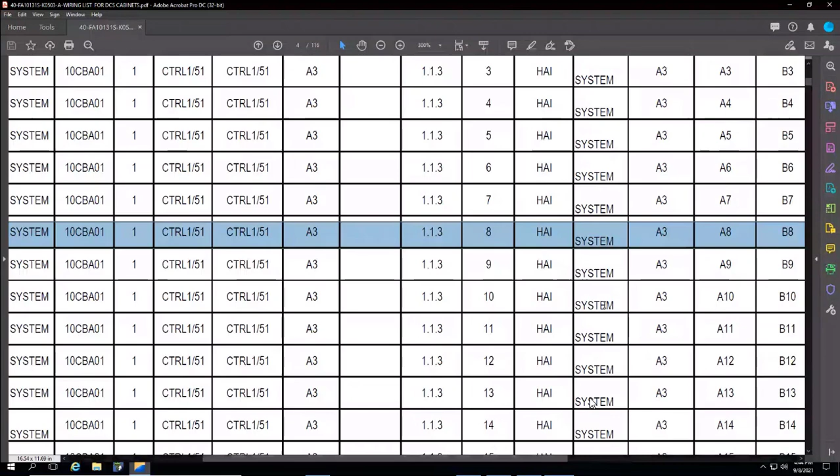If somebody gives you a direction that I want to add this point, are you comfortable to create this particular point, where this will be your point name, and this point name will be configured as an analog input AI module in controller 1 at 113 channel number 8? Give me a go-ahead if you can assign this point from the IO list. Yeah, go ahead, please.

Team, are you comfortable enough if someone asks you this requirement, to assign this point or create this point? Can you create this point name as an AI at 113 channel number 8? The same procedure needs to be repeated. Yeah, please zoom in a little bit. This is my point name. Yeah. Do you want them to create this one now? No, I just need a confirmation from their side.

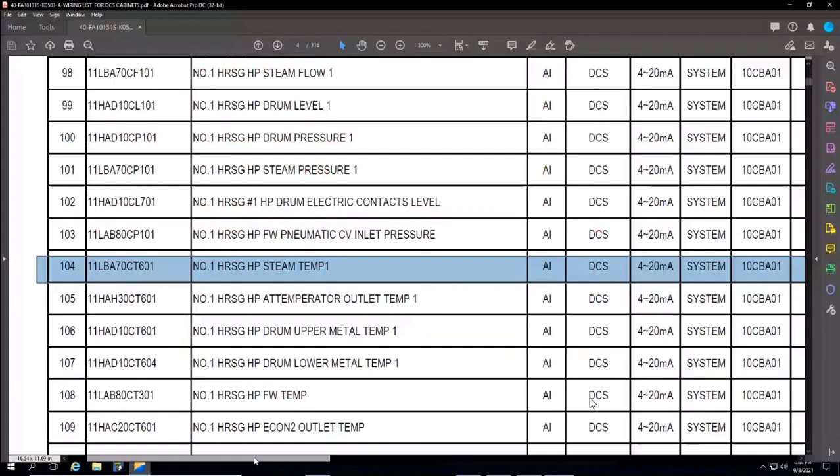The procedure will remain the same. They need to create this point name, assign the hardware, add the module. So I'm just asking them whether they would be comfortable enough. Just replace LT21 with this point name. That's it. It is an AI and it will go to 113 channel number 8. So can participants do this activity as well? Comfortable? Okay. Yes, they are comfortable.

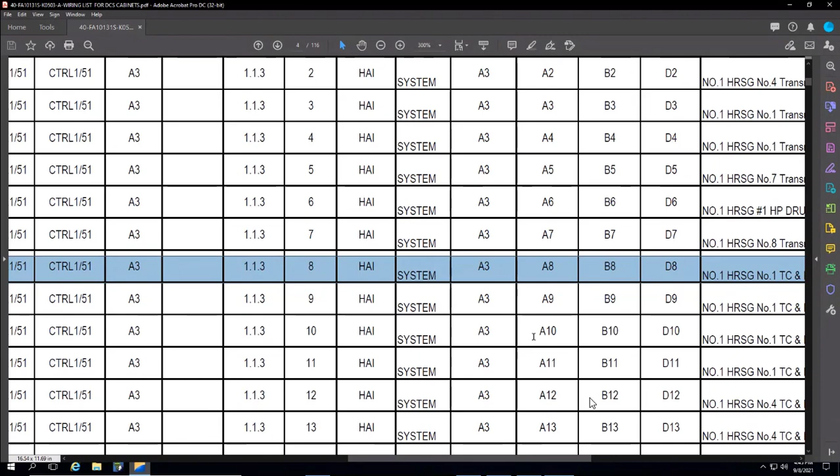Okay. In that case, there is a small exercise for you, which needs to be done after today's session as homework. You already have this IO list with you, right? This IO list is already available in our WhatsApp group. I want you to take any 4 points from this IO list. Every participant who is sitting on controller number 21, controller number 22, and controller number 24 will pick 4 points from this complete IO list, which is around 116 pages. Out of all these points, take any 4 points.

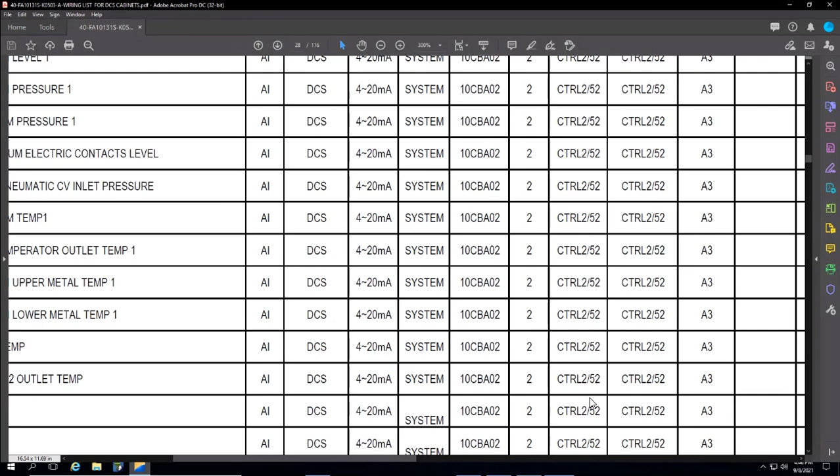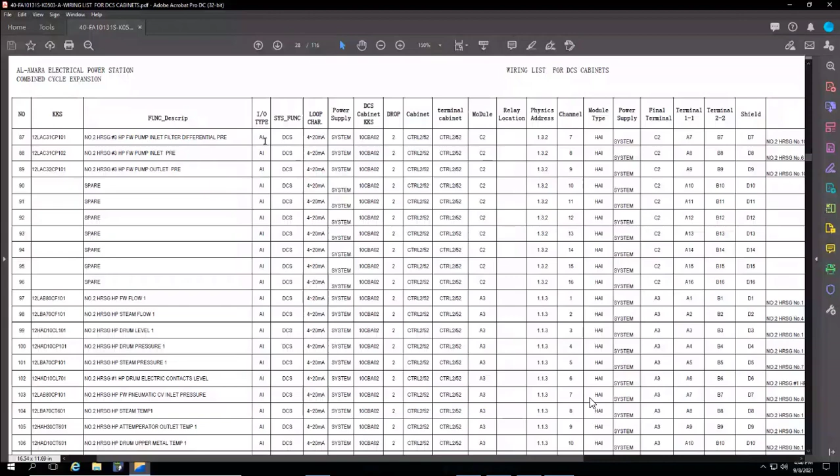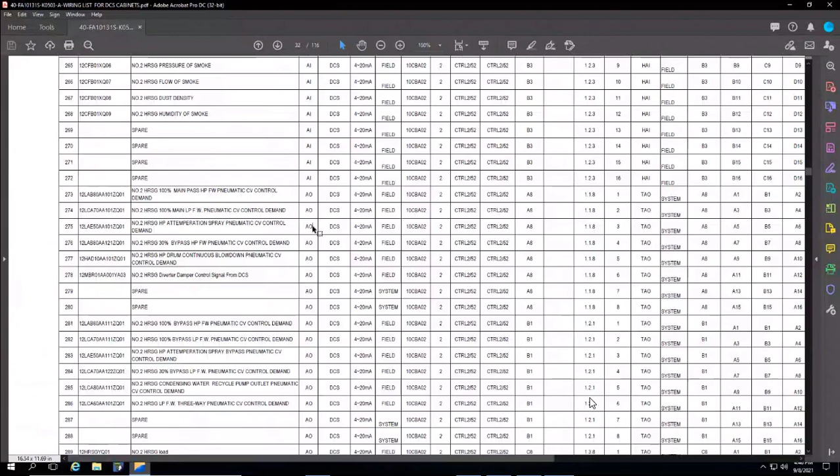For example, one should be AI here in this Excel. The same way, one should be an AO, point number 3 should be DI, and point number 4 should be DO. So this way you have to divide your 4 points from this available list. The same way what you did over here, you need to do it for your project points. Take any 4 points, AI, AO, DI, DO, and assign the hardware of these points as per the address which is mentioned in front of them over here.

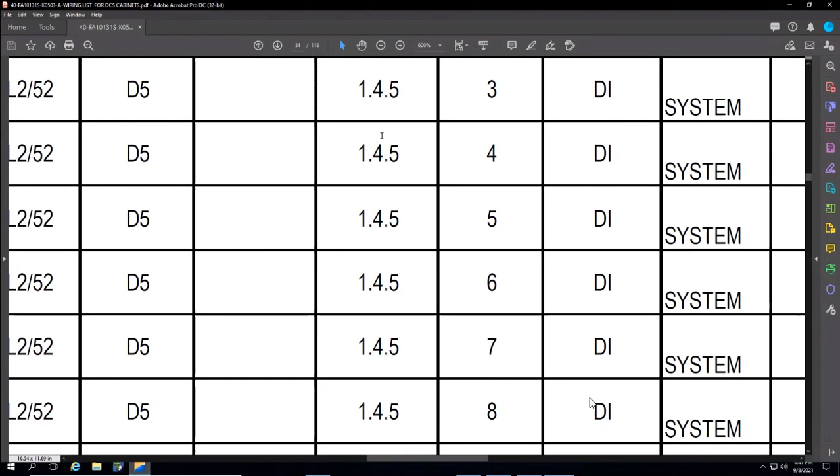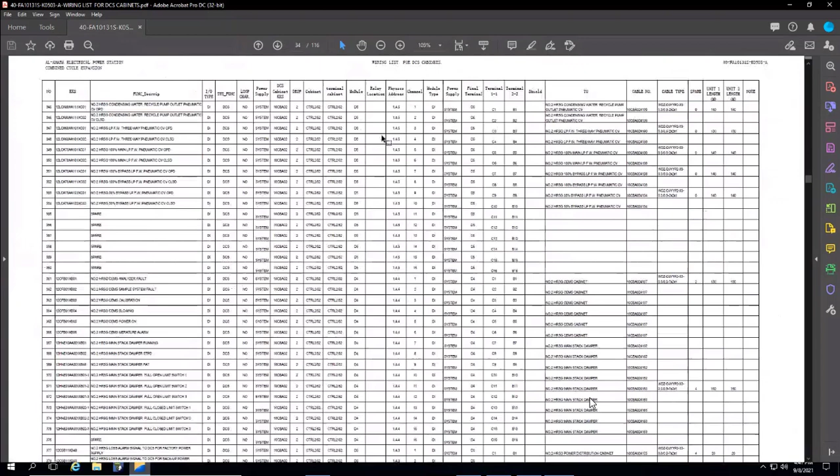If you don't have any module, insert a new module, make a module point, and I will be checking this activity tomorrow morning. Okay, so that's an exercise for you, just to again provide you the grip with point creation, module creation, linking the hardware of the module point, and assigning the channel of the analog and digital points. So that's the homework for today.

So tomorrow morning he will be checking the 4 points, right? AI, AO, and DI, DO. You just select whatever you want from the IO list we sent to the WhatsApp group, any of them. But the data should be prepared for tomorrow morning. You have to finish it by tomorrow morning. Homework. So, after we finish, we go.

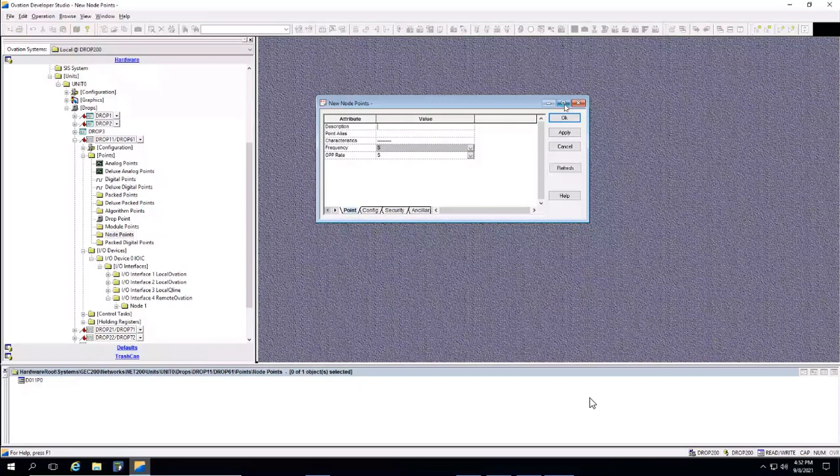Maximize the window, go to the security tab, give the administrator rights, go to the hardware and link the hardware of this node point as well. From the drop down, I am creating this node point for this node 4.1. Press OK, and this way I got another node point.

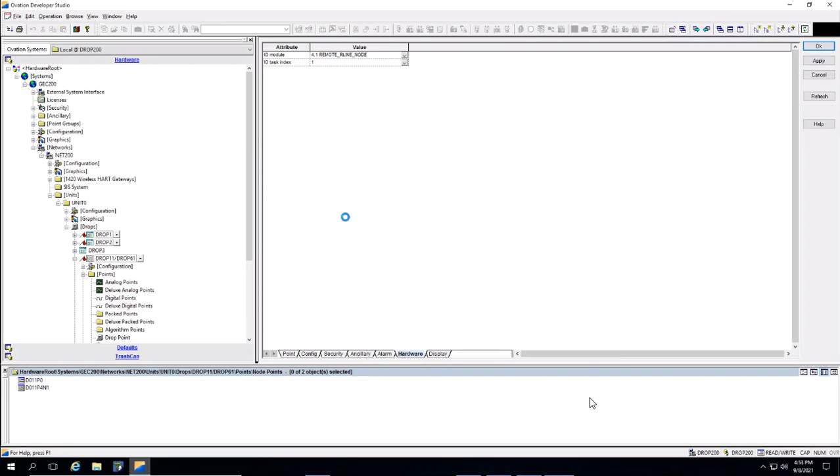Once I created a node point, then again I will repeat what I told you yesterday. I need to add a new control task as well. The existing control tasks are over here, and if you need to add a new task...

Initially, say I'm using drop 23. Please see this activity, this will be again your homework for today. Expand your drop 23, go to control tasks, and you can see only 2 tasks. Same way, these 2 tasks will be available for all the controllers 21, 22 and 24, since these are newly added controllers.

If you need to add a new control task, within the controller level, there is a configuration heading. Expand the configuration, open it, go to the control header, and at this particular point there is a provision to add a new control task. Right click, insert new.

Select the task number that you need to enter over here. Say I want to add task number 3, since 2 are already added. Finish and OK. Now you can see task number 3 is created. This way, we need to add all remaining 3 control tasks.

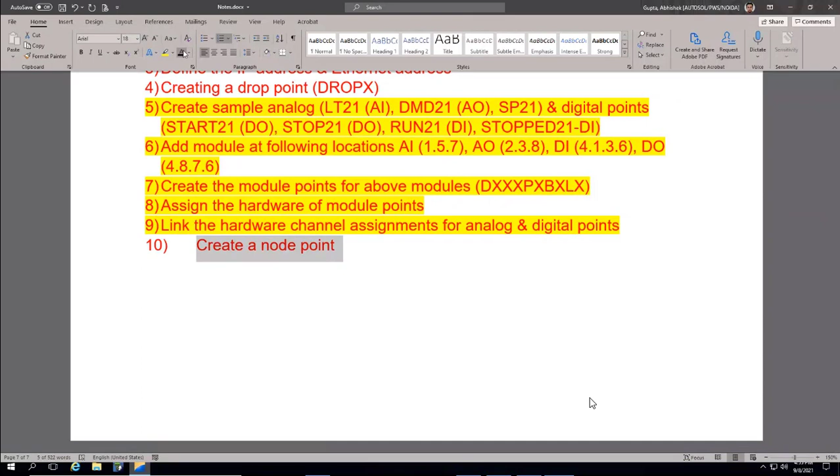So moving forward, the next activity says create a node point for device 0 and assign the hardware. And the node point you already know.

Same way, you have to create a node point for device number 4, using the point naming convention as DXXX, PX, NX.

The next activity for you is to add control task number 3, 4 and 5 in your controller.

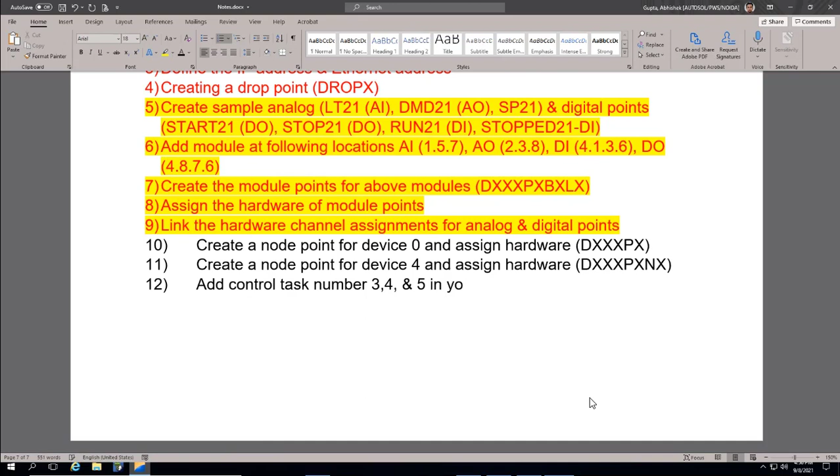This can be done by navigating to your drops, then configuration, then controller, then control task.

Any doubts up to this point? Any concerns? We don't understand in the node point why he had node point from the IO device. There is one question: why do you add the node point from the IO device?

A node point is used to see the status of the starting node. Just like you make a drop point to see the status of the controller in graphics, you make a module point to see the status of the IO module in graphics. The same way, you need to create a node point to see the status of the starting node from which IO branches start. At that starting node, we get the power supply status. So that's why we need to build a node point as well.

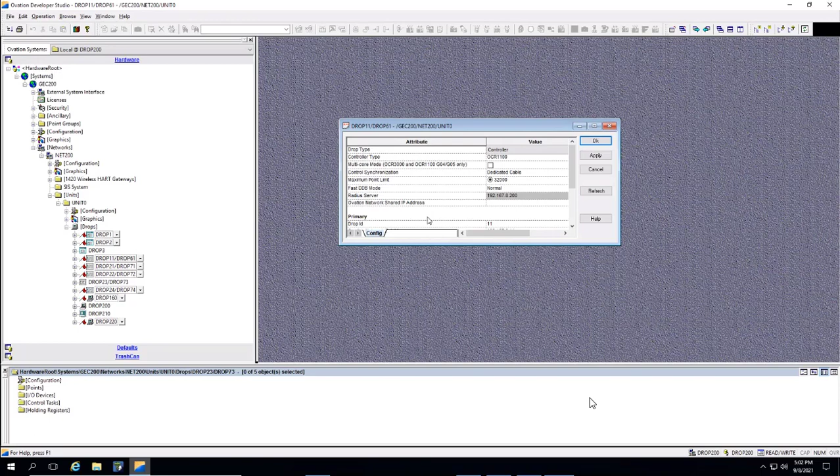I cannot hear what he said. Yes, all of us now, I asked them, they don't understand the node point. So can he please explain from the beginning, having the node point from the beginning? Sir, all the students have one question. They don't understand about the node point. Could you please explain again? Okay, from the very beginning.

See over here, you did this activity, right? In this activity, you created a new controller at step number 2. Please listen first.

I have no choice, this is the voice, this is the maximum voice. So please be quiet and listen. Very careful. Go ahead sir, yes, is my voice audible?

Okay, so as I was saying, in step number 2 you created a new controller. Since you added a new controller in your hierarchy, you will not every time go to the control cabinet to see the real-time status of this controller. So you need to create a specific point. That point can be used in the Ovation graphics or screen display, and operators and engineers can see the real-time status of this controller within the graphics. Is it right?

So there were 2 pictures I sent to the WhatsApp group showing the status. You have the LED green and red. Is that the node point? Yes, the image that you sent us for the power supply, we use node points over there to see the power supply status.

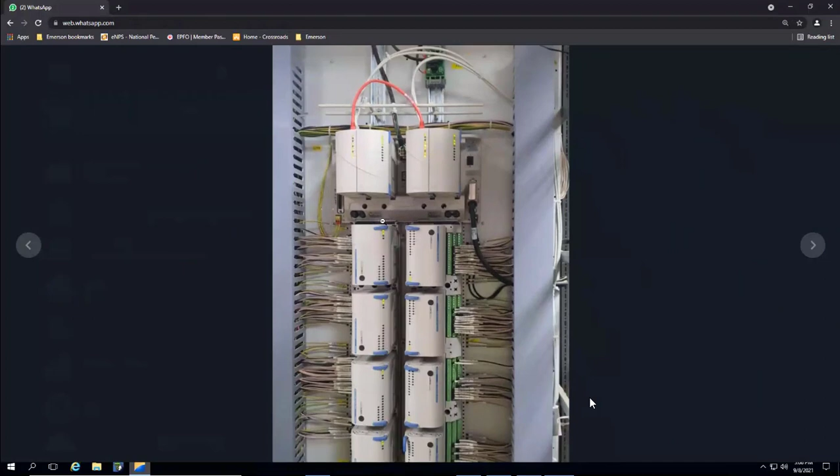The same way, for the module, the card that you have entered over here, let me show you an image which was sent by you guys only in our WhatsApp group. That was the image sent in our WhatsApp group. Can you see this module? Yes, this module has 4 LEDs at the top.

This one. So every time nobody will go to the cabinet to see the status, whether power is okay, communication is okay, no external error, no internal error. This way nobody will go to the module every time. The same way nobody will go to the controller to see these LEDs; LEDs require physical inspection. But if I want to see this indication of this controller within the graphics also, for that purpose, for this controller status, we have a drop point. The same way for this module status, we have a module point. The module point gives us the status of this card into our Ovation graphics. This is the purpose of the module point. Give me a yes if module point is clear.

Yes or no? Drop point is for monitoring the controller status on the screen.

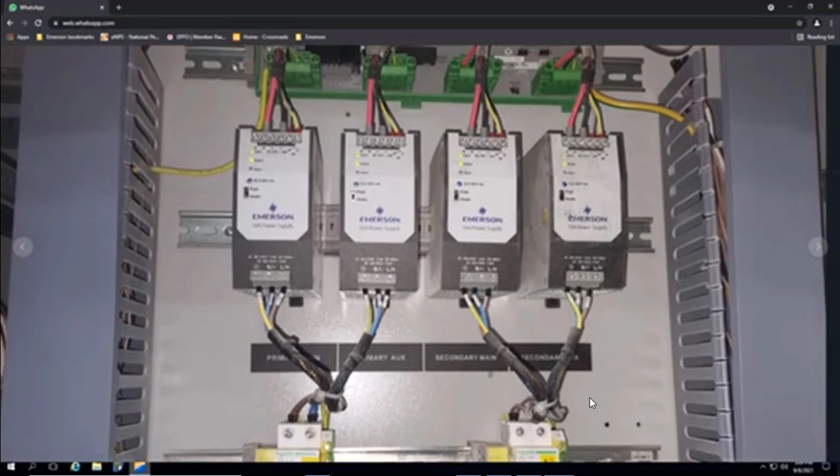Okay. We go ahead. Yeah, we are clear with the drop point and module point. Please go ahead. Okay. The same way, when you are clear with the drop point and module point, there is an Ovation power supply as well. Like this. This is Ovation power supply, right? Yes. This power supply goes into this PDM module, and that's a P9 port. This one. Yeah, P9.

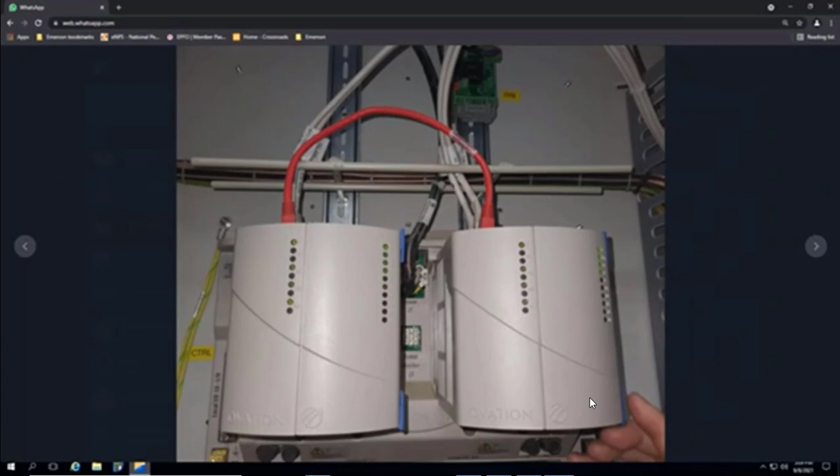From this P9 port, a prefabricated cable with the 7 cores will travel and will go at this point. Okay. So this cable is coming from the P9 on the rear side. This is known as a starting node. And for this node, I am creating a node point to show me the status of the power supply which is coming from over here. Like this.

So that controller board port P9 is a dedicated node, and it gives you the power supply status, whether this power supply, this one and this one is okay or not. How? You will make a graphics like this. See, you also gave me this image, this graphic which gives you the power supply display. And in this you can see the LEDs, drop 1 and 51 along with primary and main and auxiliary supplies as well. You will be configuring node point behind this graphic display to give you the status which power supply is working fine or not.

So it is for this reason that we create the node point to see the power supply status in the graphics. Is that clear for everyone? Just for power supply monitoring. Yes, on the power supply screen. We have 2 power supplies for each node, main and auxiliary. And now we create just 1 point in the node. We have main and auxiliary, so how we create only one node point, how it's monitoring both status?

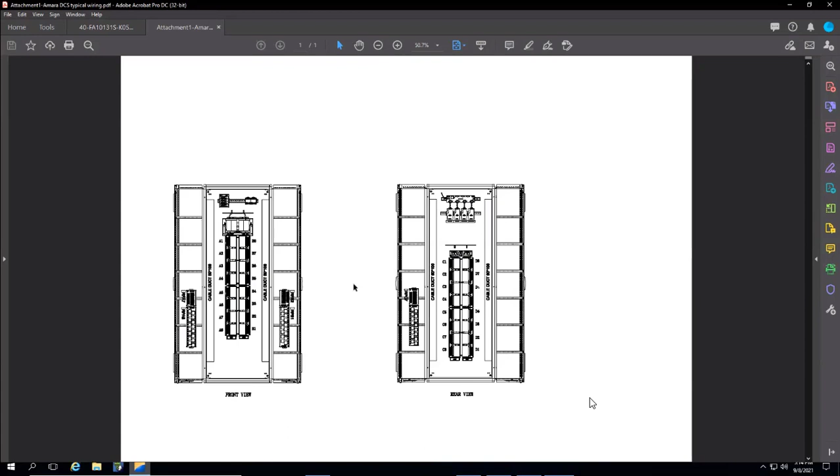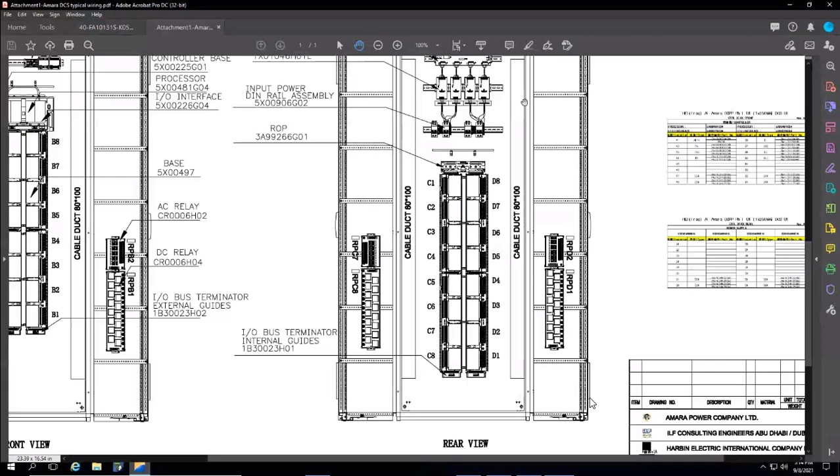When you'll be opening the control cabinet, first you'll be seeing this particular view. This we call it a control cabinet. This one. This control cabinet is always known as a front view. On the back side of this, you mount your power supplies, and we call it a rear view. Yes. If you have another set of branches as well, this is front view, this is rear view. Both these assemblies are a single cabinet itself. This assembly of rear is mounted on the back side of this plane.

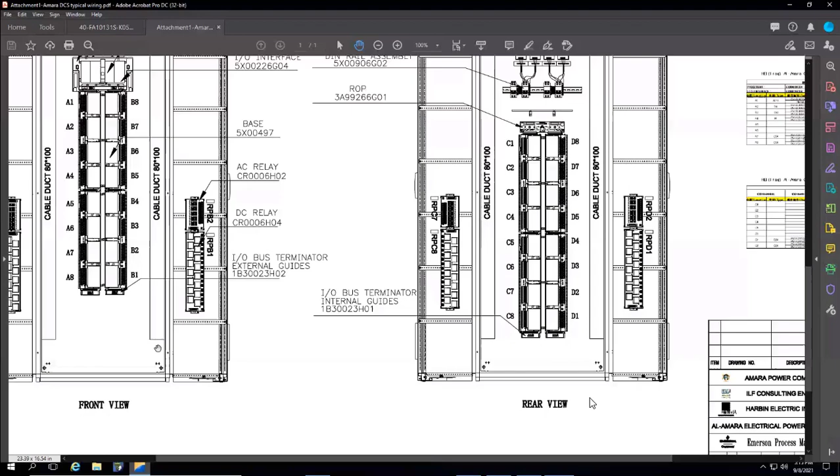Apart from this, there will be another compartment towards the right or the left. That is known as extension cabinet. It is the same cabinet only, front view and rear view. Both of these are known as control cabinet only. Yeah, actually both are control cabinet, but only the name is different. One is called control, one is called extension.

No, you are getting confused once again. This is the front view and rear view of the same cabinet. So this cabinet is known as control cabinet only. Extension cabinet is different. Extension cabinet is that cabinet which has another set of branches, and may or may not have an additional power supply. When I name this cabinet as control cabinet, how can I provide it another name as well? So this is a single cabinet, front view and from the back. So this will be known as a control cabinet only.

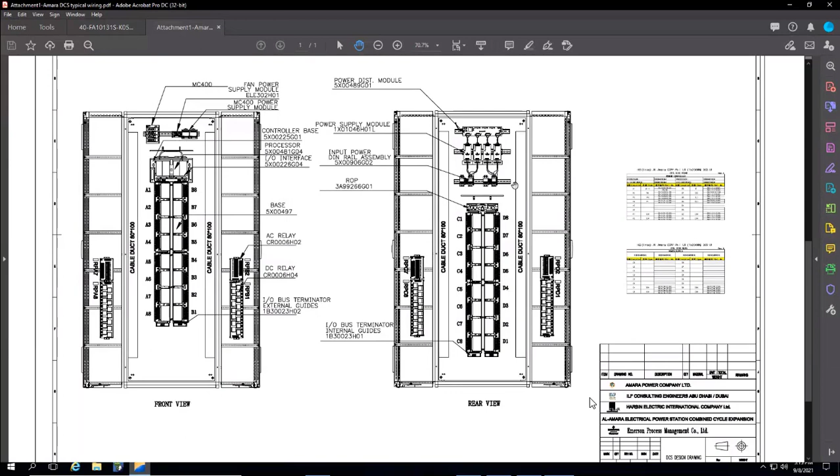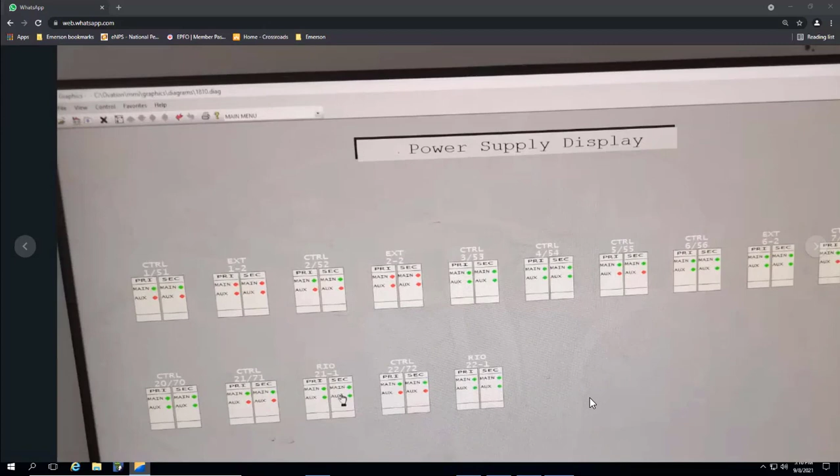Apart from this, there will be another drawing for control extension cabinet as well. You have not sent me those drawings. So there will be a drawing for extension cabinet as well. And within that extension cabinet, you'll be having another power supply. And this is for this purpose. Control cabinet power supply, extension cabinet power supply. Like this. Are you getting what I'm trying to say?

Yeah, but I'm thinking by the name. I think extension panel 1-2 is somehow related with control, because the numbers, both 1 and the control, 2/52 and 2-2, have something related. What I can assume from this drawing is control, that's a controller 151. That's a primary main, primary aux, secondary main, secondary aux. So this power supply is nothing but this one only.

This is this power supply, right? Yes, correct. Okay. This is mounted on the back side of this. You can see your controllers. This is control cabinet. Yes, control cabinet, the back plane, back side. Like this. So this is a single control cabinet. On the back, this cable is coming from this power supply. Right? It is going towards the back. Yes. So this single unit is a control cabinet.

Yeah, so again for the node point, P9 is for the control cabinet power supply monitoring, and P10 for the extension cabinet power supply monitoring, right? Yes. And P11 for the remote? No. For remote, we have a separate power supply which is installed at the remote side. P9, P10, P11, all three cables are dedicated for the local Ovation network only. If you have more power requirement, every ROP needs power. Let me show you one diagram which we drew yesterday in Paint.

Amjad, P9, P10, P11, all for the local power supply monitoring. Okay. Can you see this ROP? Yeah, we can see it. This ROP needs power for operation. For that purpose, you need certain power supply requirements. The same way this ROP needs power. The cable which we have connected over here is only for the data transmission. There is no such power cable attached.

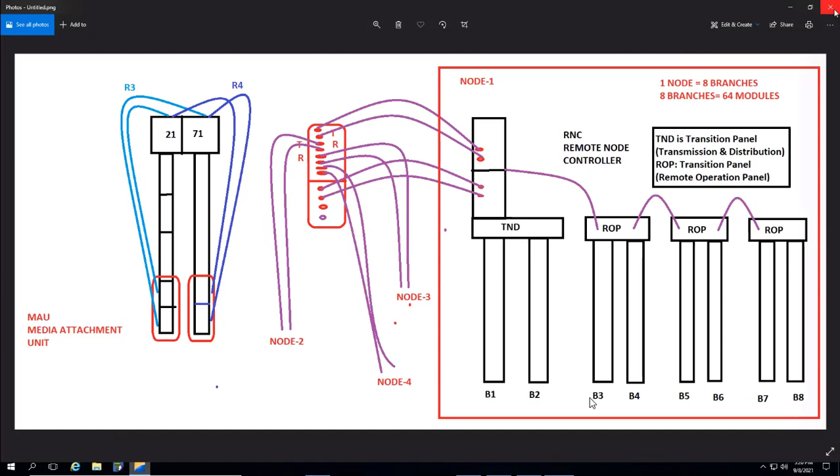Now, we normally have 3 ROPs and 2 additional ports are left, P10 and 11. But the third ROP can have another cable for power in and power out and can be connected to the 4th ROP. Like this. Okay. That's because we don't have another P12, right? Yes. So the whole and sole purpose of a node point is just to see the power status in our Ovation graphics. Since for remote we have a separate power, that's why we have another node point for the remote Ovation network.

Is it clear? One more question. Yes. Before taking this question, first tell me whether the node point concept is clear. Node point is clear for everyone? Node point, is that clear? Please, come on guys, yes or no? If no, just tell me no. Yes, just answer yes. Still 50. Just power supply monitoring, nothing else. Yes, okay. You get it?

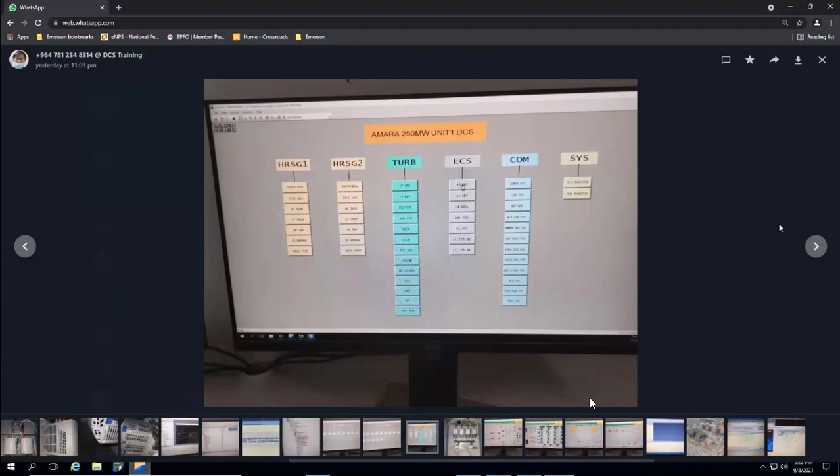In Emerson we have 3 types of power supplies: 5 ampere, 10 ampere and 20 ampere. Right now at your side I can see only a single power supply of 10 ampere like this. So depending on your load calculations, number of AO and DO modules, the module power requirements, only this power supply is sufficient. If you have a large number of modules, then you may have to take either the 20 ampere power supply or another power supply of 10 ampere. This way it depends on the load calculations.

Question is, I don't ask about the capacity. Like I need 4 ROP. So I need four connectors for power supply. Here I have only 3 connectors. P9, then P. Do you understand my question? Yeah, I think in that case, you just add another power supply, then you will have 6 connections. So it's enough for your 8 branches. Is that the same question you asked, right? Yes, I mean I have 8 branches. You don't have enough space here to connect. Yes, I only have 3. One of them goes to the controller, so only 2 stay for ROP.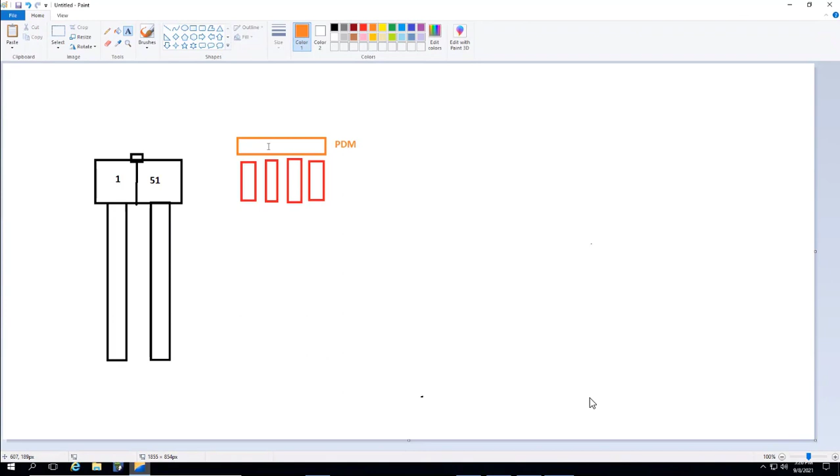You mount your power supplies over here as primary main, primary aux, secondary main and secondary aux, with all of them going to PDM. This PDM will be having 3 bus bars: P9, P10, P11.

Yeah, I know there is a little bit of lag, but we have nothing to do. Just wait for a few more seconds.

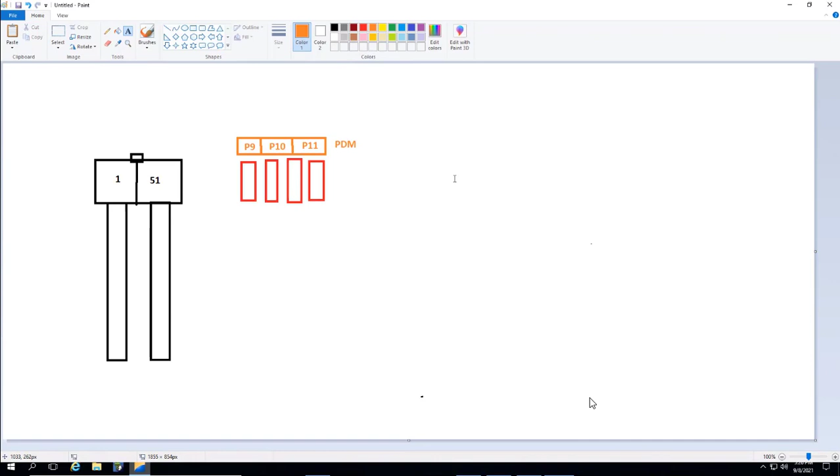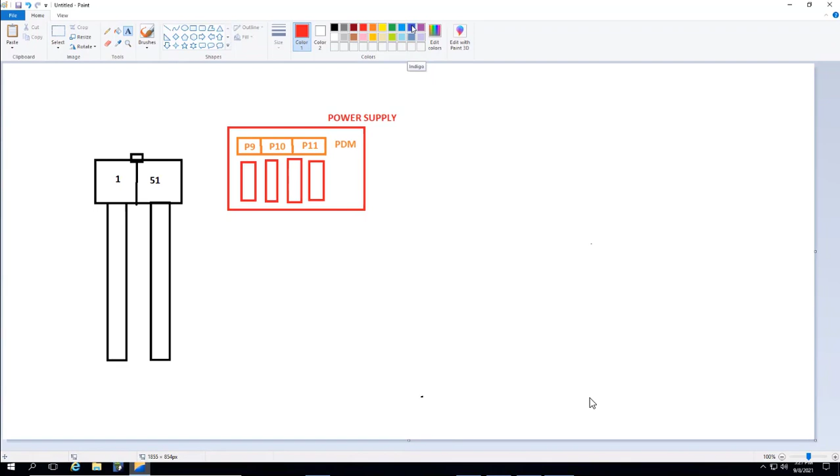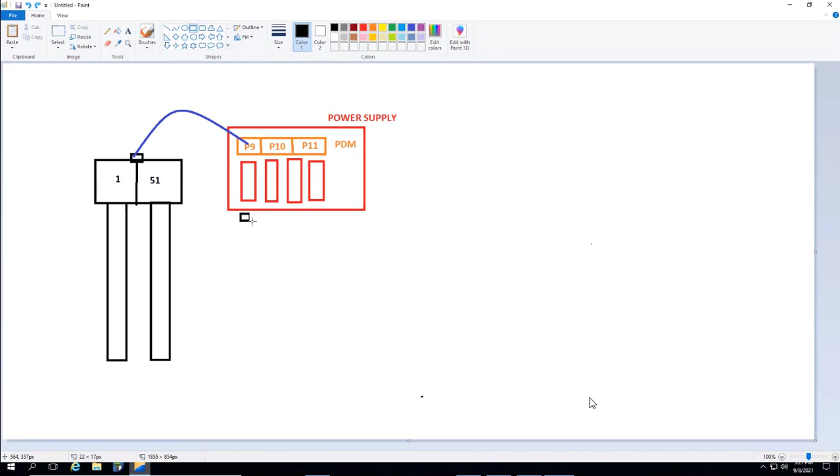Normally what happens is, this is my complete power supply. Can you see my power supply diagram? Yes, we can see it. From this P9 port, a cable will be connected to this J1 port. Is this connection clear? Clear. Okay. The same way you'll be having one ROP over here, one ROP over here, and one ROP over here.

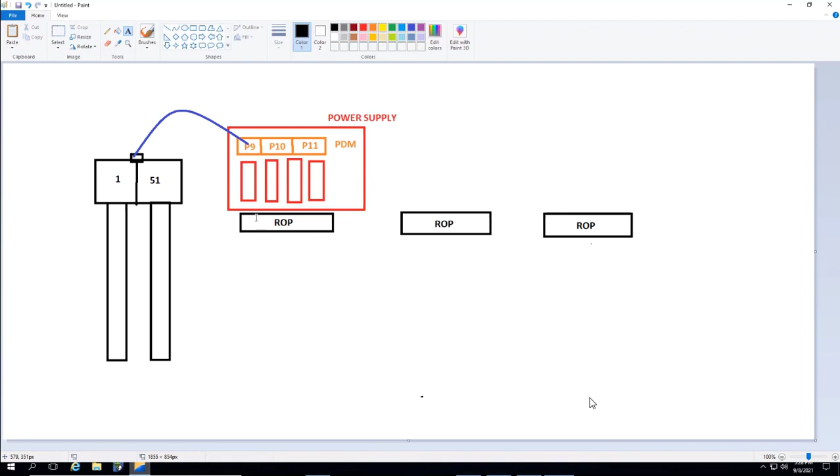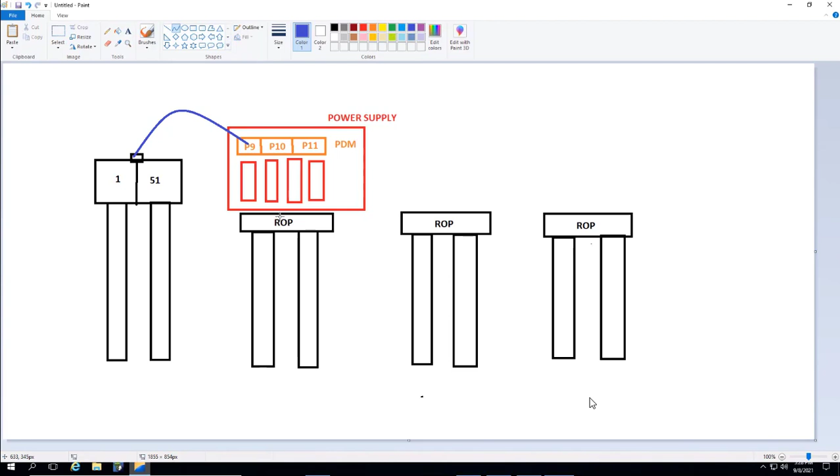From this P10 port, from this P10 port, no, no, this is behind. Is this connection clear from P10 to the ROP? Is that clear? From P10 to the first ROP, is that clear? Yes, clear.

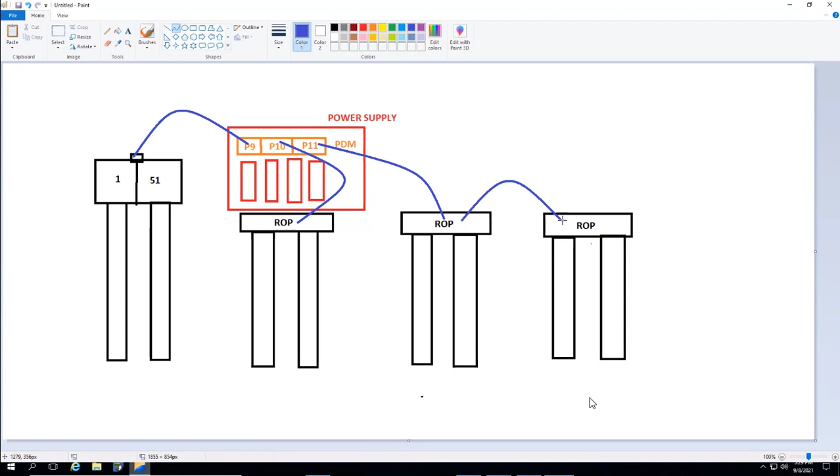Is the third connection clear from P11 to the next ROP? Yes. This is how power is supplied from the third ROP to the fourth ROP with a prefabricated cable of separate power supply.

Does that answer your question, Mr. Mohammed? Yes, yes, it's clear. Okay, it's clear now, sir. Thank you. Okay. So this is how we provide the power supply to the various other units. No other power supply is required, or no other special port is required. Okay.

So tomorrow morning you want to see they finished all the four definitions of the points, right? Yes, let me conclude today's session, then I'll tell you what my expectation is. So today you performed this activity of creating a new controller, creating a drop, point creation, channel assignment, module point, and everything.

So a homework for you is, you need to create a node point and assign the hardware. Next, you need to create a node point for remote and you need to assign the hardware. And you need to create new control tasks number 3, 4, 5 in your respective controllers. So that's your homework number 1.

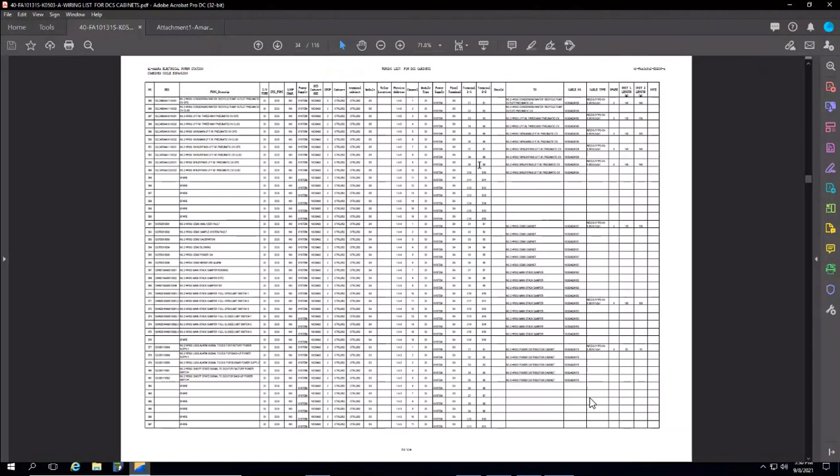Activity number 2 is, as I told you, you will be searching this IO list which is available in our WhatsApp group. Take 4 random points, AI, AO, DI, DO, and search for their hardware allocations and do this activity. So this is your homework for today that I will be checking tomorrow morning.

In case you didn't get the opportunity to work, you can come tomorrow and complete this activity within 15 minutes before starting our session. So it totally depends on your call. Am I clear? What's device zero? Okay, sir. They confirm they can finish the homework tonight, and they have another question about device 0. They're very curious about why there is a device 0 here.

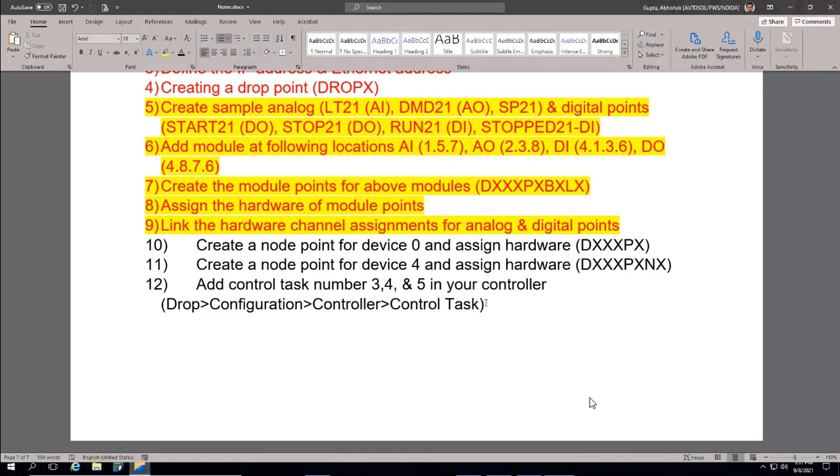I would be happy to answer your question. Before that, just take an image of this note, point 10, 11, and 12. Just take a photograph from your phone. Have you taken the photograph? Yeah, they already have. Now let me know your question. The question is why there is a device 0 for item 10. They don't understand.

And me neither. If you ask me why my name is Abhishek, I can only say that my parents liked this name. So the same way, the Ovation standardization has assumed that the starting device would be device 0, which will provide you the interface over here. So by default, since the software application says it is device number 0, that's why I named it device number 0. It is just the naming.

There is no such reason why it is 0. It is a simple name because in the application it appears as 0. If it had appeared with some other name, we would have given that name. Naming convention, from 0. In the Ovation tree itself, you can see the name is coming like this. That's why we have taken the name from this hierarchy itself.

Okay, the question is, is device one for the status of P9, for supply? P9. Yes. 0 status of what? Is device 1 for monitoring the power supply of the P9 connection? We will not take it this way. You will not segregate the ports P9, 10 or 11. Again, I'll show you this image. Don't get confused with this structure.

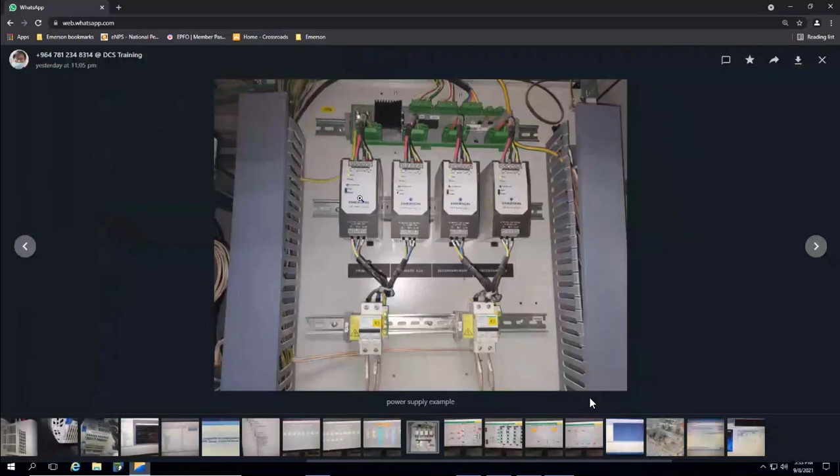See, that's a real image of a power supply. When I want to see the status of this power supply, I'm only concerned about this Emerson power supply: primary main, primary aux, secondary main and secondary aux. I will not watch these ports because these ports are finally supplying the power to the controller. If these are okay, automatically these will supply okay power. So your aim is to check these power supplies.

You connect the output of this power supply to this point, and then you get a prefab cable. So this 7-core cable is already taking its input from these supplies only. So for these 4 power supplies, you have a dedicated cable. Out of these 7 cores, 4 are for the power supply contacts, and those contacts tell us whether the power supply is okay or not.

So you will not say it is a P9 status. Rather, you will say it is the status of these 4 power packs, whether the contact is okay or not okay, like this. Are there any questions?

Okay. Now, can he just repeat? He explained in theory, now practically. Repeat adding the node point from the first. Class, from the first: how to add the node point. So please explain again practically how to add the very first node point.

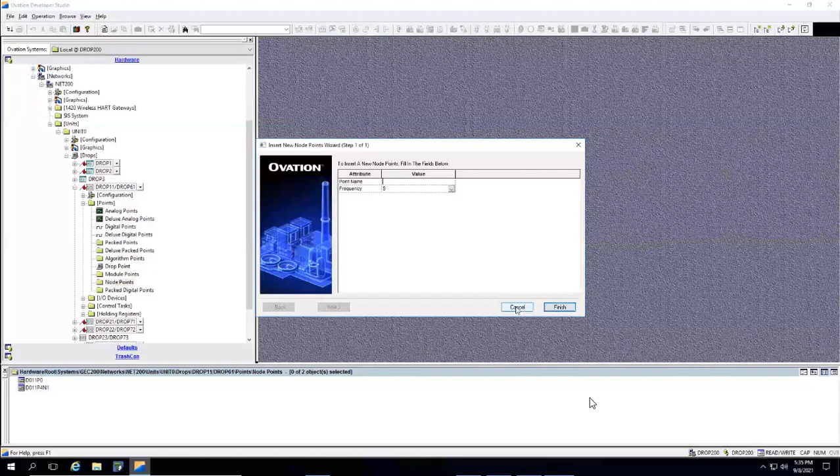You know how to add a module point? Give me a yes. Yes. The same way you will add a node point. Expand your points header, node point, right click, insert new, give the point name, click on finish. As you click on finish, you'll get a point configuration window. Maximize the window. Go to the security tab, give the admin rights, go to the hardware. From the drop down, link the hardware and press OK. So a new node point is created.

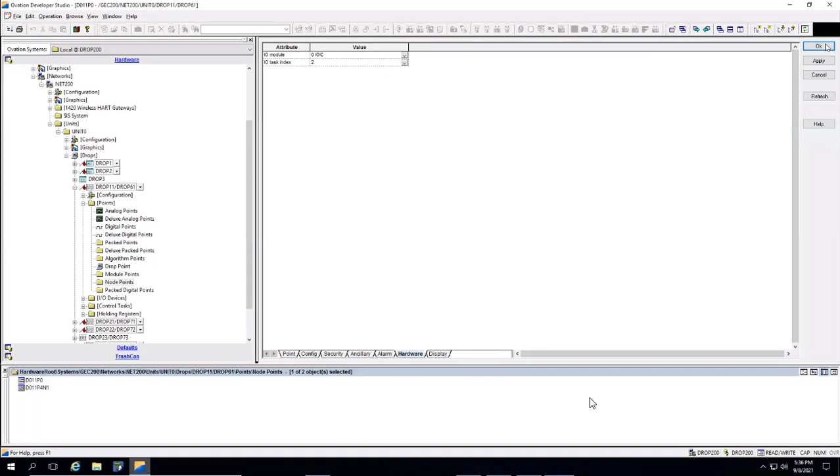Not a problem. Okay. If I made node 0 point, I need to add node 1 also? No. As I said, as a system default, you will be adding a node only when there is a separate interface. Now is it clear? Can you explain to them in Arabic? I will explain for them. Let everybody know that. Okay, can I expect from the team that you would be covering these 3 steps and 4 additional points exercise by tomorrow? Yes. Before I thought we have to add 0 and 1, but now it is clear. We only need 0.

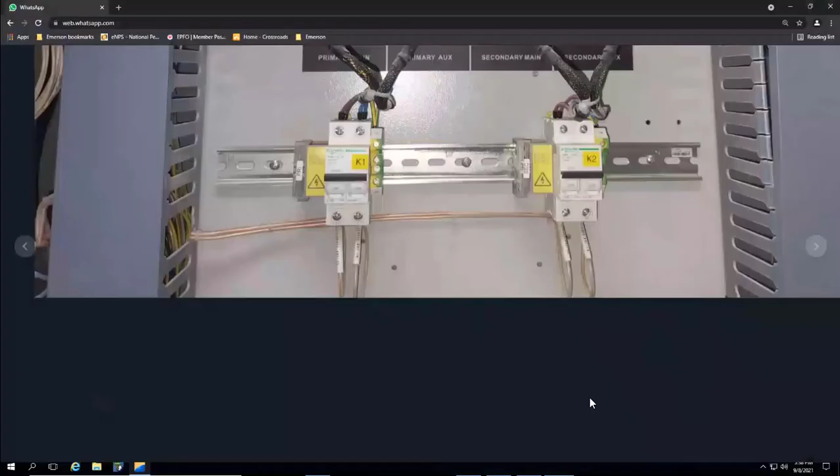Is it possible to go back to the last Paint slide about the power supply? Can you repeat? The Paint sheet you already drew. Just about the power supply, I want to explain for my friend in Arabic. Not this one. Paint. Yes, that's okay. Just keep this. I will explain in Arabic for my friend. Okay. We finish for today? Yes, it is all done from my side. Okay, sir. Thank you so much.

One more question from student 23. He sent a picture in the WhatsApp group. He wants to try to connect again to the server. See, this message occurs for 2 specific reasons. Either you are not connected to the VPN, or your internet is not working. The internet is the same for everyone here, so check whether your VPN connection is good or not. He said it's already connected, he can open Ovation Studio, but it's very slow and frozen sometimes. In that case, he can take control of my cursor and do it in my system. So maybe take control remotely, remote desktop, tomorrow morning, because he finished his session.